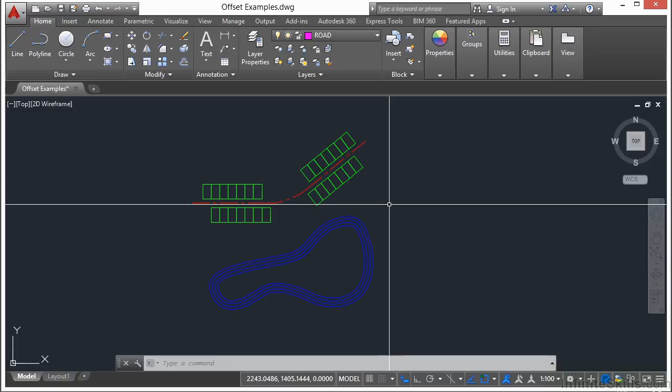First we start by starting the offset command. Type in the word offset, or type in the letter O for offset. Or you can go up to the Home tab on the ribbon, go to the Modify panel, and then go to the offset command. Either way, it starts off the same way.

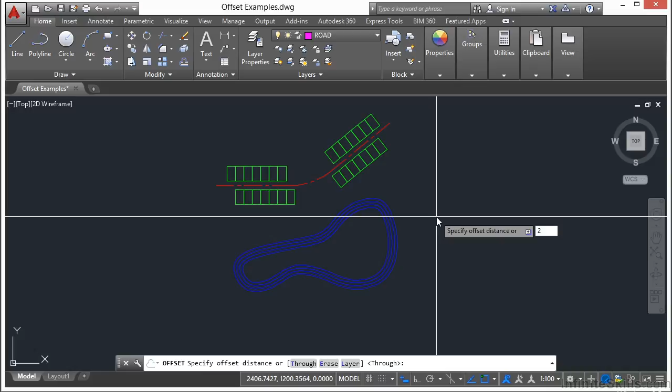First you want to type in a distance. In this case, I'm going to type in 20. Press return. Now let's select the object to offset. I'm going to zoom in, pan around, and select this line right here.

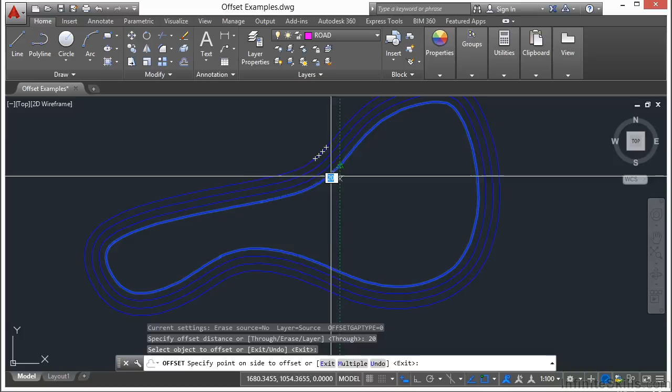Now when you start this part, after you select the line, it starts right into the offset command, so you can see a little preview of where that new line is going to go. I'm going to offset this line by 20 units, either on the inside or outside of the line. Let me zoom in here a little closer. You can even see as I move my crosshairs around that I get that little dimension there that AutoCAD is reminding me that you're offsetting this 20 units.

And you get that little preview of where the new line is going to be created relative to your offset line, the original line, by where you position your mouse according to that original line. So whichever side of the line you put it on, that's where it's going to go. Once you have your cursor in position, left click, and you have created a new line offset at 20 units.

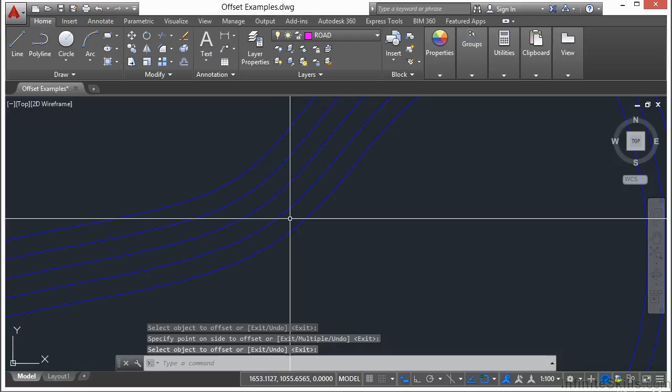So wherever I measure, if I measure an exact perpendicular distance from here to here, I am going to have two perfectly offset parallel lines that are 20 units apart all the way around. And it's actually that simple.

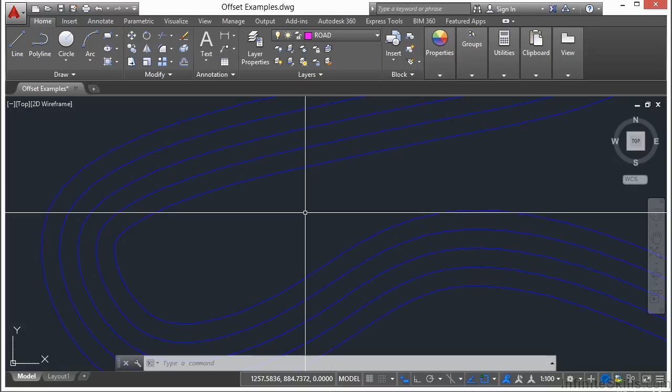So maybe you don't want to offset by a specific distance, but want the new line to pass through a specific point. Let's say you don't know what that distance is. You can measure it, do the math, whatever it is you need to do, or you can guess, and then type in the distance.

Well, the offset command has an option. For example, let's scroll up to this little roadway. We have the center line, we have the lot lines. Let's say we want to put a new right-of-way line that parallels the center line, but matches up with the front of these lots. I don't know what that distance is.

So I'm going to start the offset command, press return, and you can see here that I have different options. These three options allow me to do different things. One is the layer - this way I can offset my new object and put it on a specific layer, which is actually very nice because a lot of times I don't want it to go to the same layer. It's kind of like doing a copy command. You can see here when we did our contour line, it copied the old one and left it on the same layer.

You can see here when we did our contour line, it copied that old one. It left it on the same layer.

So I'm going to change the layer, type in L. I can say current or source. The source is the default setting for your offset command, and the source just means it's going to match the object that you're offsetting. I'm going to switch it to current because currently I'm on the roadway and I'm going to make this a roadway layer. So now when I create this, it won't be this red center line - it'll be a magenta colored line.

And I can also pick an erase button. If I pick the erase option, which in this case I don't want to do, it will erase the original line and only create the new one.

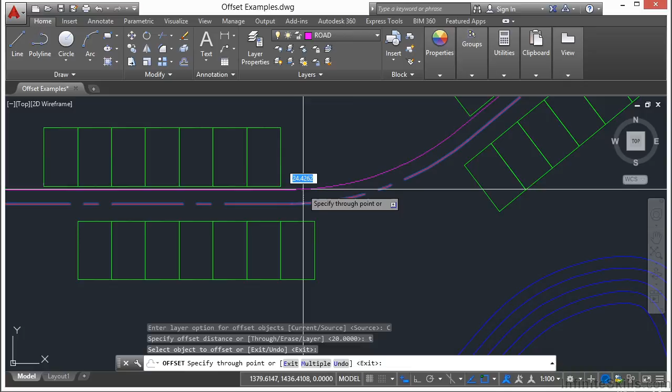But now I want to offset through, so I type in T for through. I select my object to offset, which is my center line. And remember before I had to type in a distance? Well, you can see here now, I can still type in that distance. So I can kind of eyeball it and say, yeah, that looks about right - 80 feet or something. Or in this case, it looks like it's going to be more like 30.

But that's not what I want to do. I just want to snap right to this point. I'm going to zoom in here. I'm going to snap to this endpoint, and there it is.

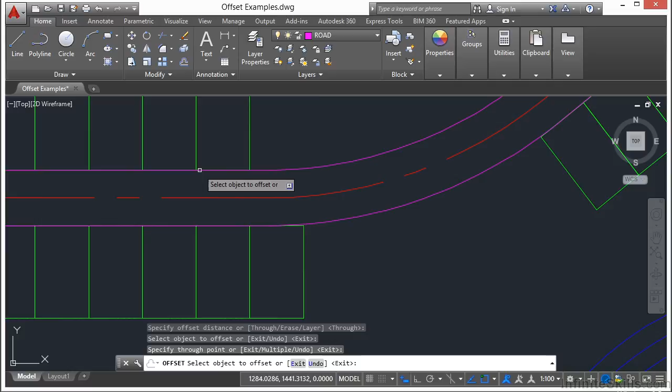So I offset this center line 30 units because I just used the through option and put it to the current layer. Now if I offset again, if I just press enter, it'll default back to that through. Select this line, pick my other object, and there we go - now I have my little roadway.

So you can see the offset command is very useful, very quick, very easy to do. It can help you create a lot of different things, especially long parallel objects. You can offset a line, a polyline, polygon, an arc, or a circle. You can do all of those sorts of things.